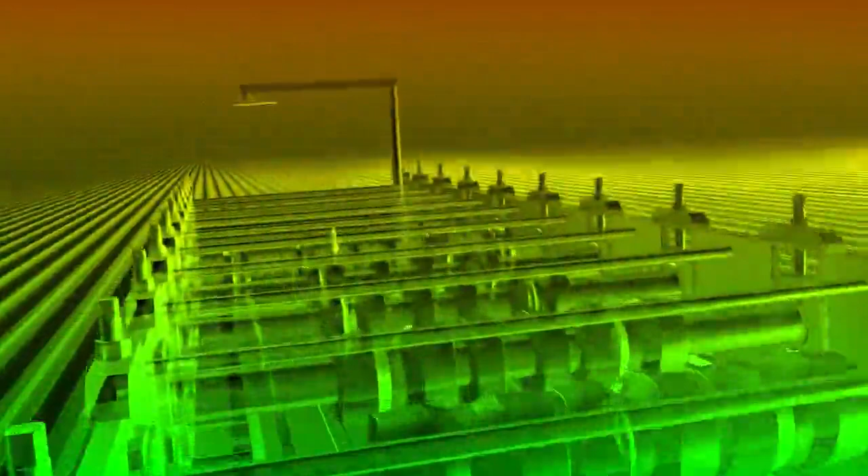The four things we're going to cover here: first, a basic introduction to roll forming, then the advantages and disadvantages of roll forming, a comparison between roll forming and brake forming, and then my favorite part, guidelines to consider when designing your parts with roll forming in mind.

And it all starts with an introduction to roll forming. At this point, I'm going to let Pat and Mike take it away.

Roll forming is a high-speed method of bending coiled metal, generally speaking, into a custom shape by passing the metal strip through a series of rollers. What's shown on the schematic is a basic line.

First off, we've got an uncoiler where the coil of material is fed out into the process. Typically there's a press we call a pre-punch press where we punch features into the part, whether they're holes, notches, tabs, or embossments. From there, the material is fed into an entry guide to give it a good, straight, square start into the rolls where forming takes place.

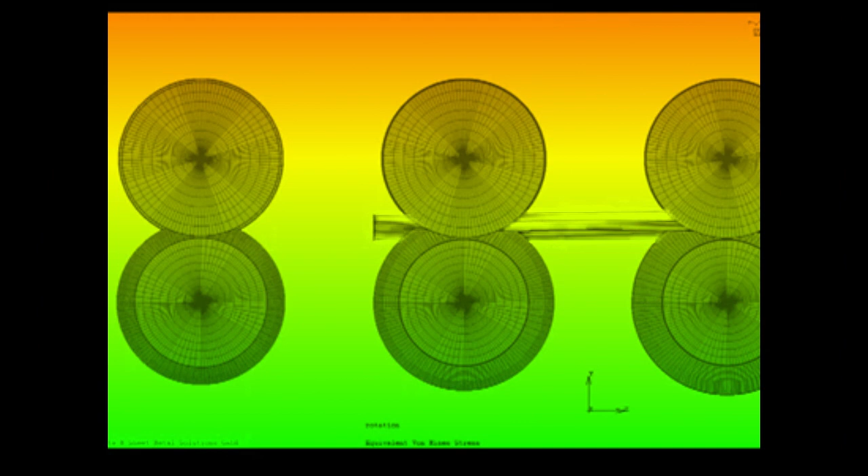Next in the line is the roll forming mill itself. We've drawn here schematically a mill with 16 passes, but honestly there's anything from only a couple of passes up to 30 or more in some roll forming machines. This is where the forming of the actual profile takes place in the mill.

Then at the exit end of the mill, there is a straightening device. Here's where we tweak the part a little bit. By this point it's at its finished and final shape, but there may be some adjustments needed to compensate for a slight twist, camber, or bow.

The next piece of equipment in a typical roll forming line is a cut-off press, where we cut the part to length. There could also be a post-punching press between the mill and the cut-off press, but in this case we didn't draw it that way. The part is cut to length and then put on a runoff table or runoff bar, where it's made ready to either be packed into shipping containers to go out to the customer, or put onto a cart and moved to another place in the facility for additional secondary operations.

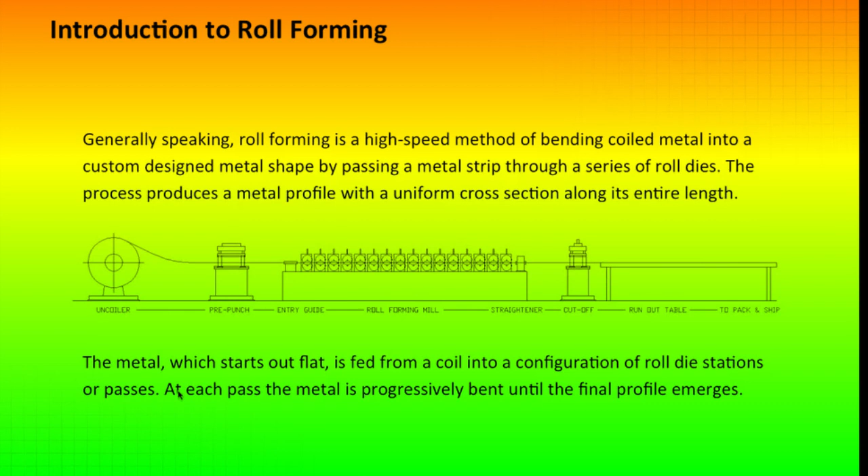All right, let's go on from here. Let's go to the next slide, Alan, which will show a set of roll tools, roller dies.

What you see here pictured is a model of a typical set of roll form tooling. You'll often hear roll formers speak of passes of tools, and that's how we refer to each set of top and bottom, or male and female, rolls. If you count them here in this model, there are actually 6 passes.

They're not shown in the mill, but they're shown as though set up in the mill. The light blue spindles indicate the machine shafts. At the top left, stock from the uncoiler would enter the mill as a flat strip, then progressively formed in each pass, going from pass 1 at the top left to pass 6 at the bottom right, where you'll see the final channel shape, in this case a simple U-channel, exiting the last pass of the mill.

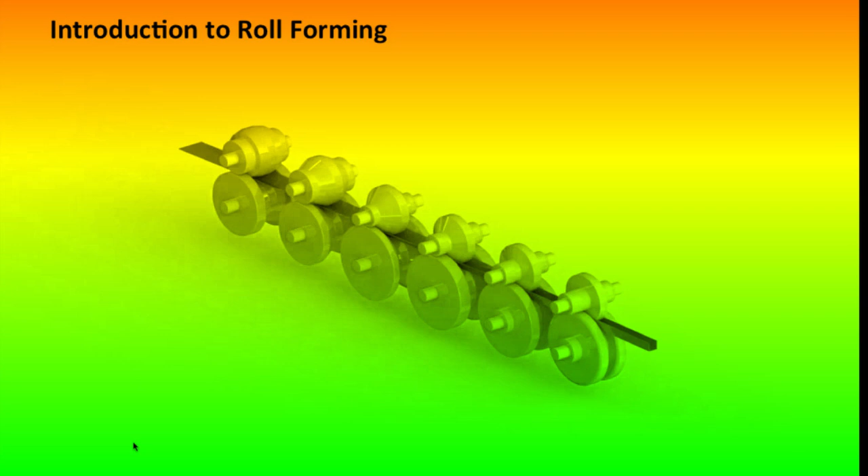Just a side note here, this is really just a representation of what you might expect to see. A light gauge U-channel or a light gauge part with short legs, very simple, might not even take 6 forming passes. On the other hand, you might require many more passes if the shape is complex or if it's a very deep channel. So keep in mind this is just representative of what roll tooling would look like set up in the mill.

What we want to do here is take a look at what would be representative of a single pass of roll form tooling. Let's focus on the section at the upper left where there's a green outline at the top of the rolls, T1, T2, T3, T4, representing the top roll or roll set. Then B1 through B4 in blue represents the bottom set of that pass. So what we're showing here is like an end view or cross-section view, something similar to what a tooling engineer would design for building these rolls, of course without dimensions.

You'll notice that the rolls are segmented or split, sometimes called slices. We have a couple of basic reasons for doing that. First, segmented rolls are much easier for manufacturing purposes. Rather than cutting the whole top or bottom out of a single billet of tool steel, we cut slices that are each closer to the finished size, so we waste less material. Being segmented also makes it easier for handling by operators. When they're going to put these in and out of a machine, the individual segments are lighter than if you had the whole top roll as a single piece, and the bottom too. The other reason we segment these is because it gives us a chance to use them as a universal channel set.

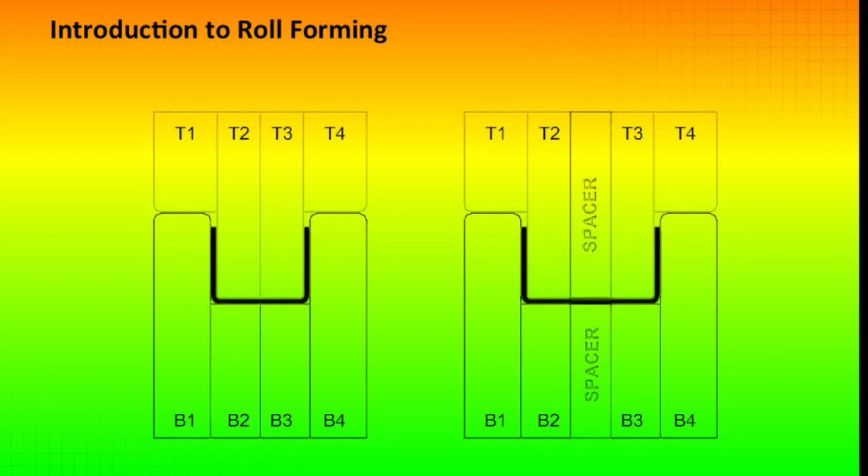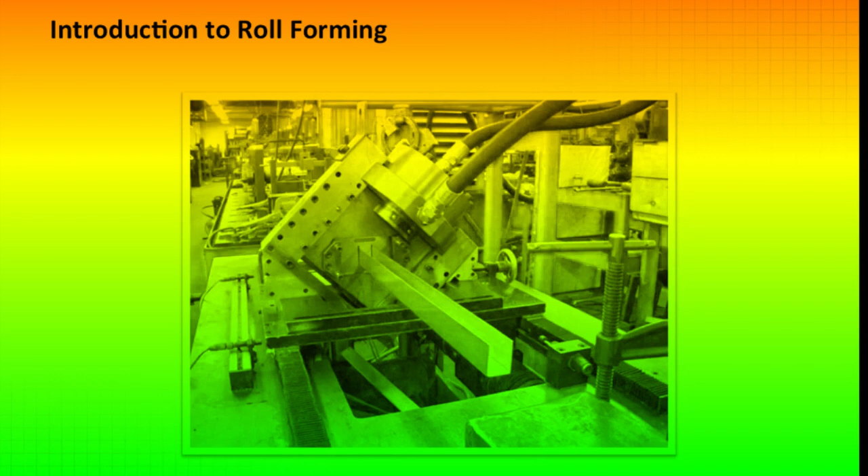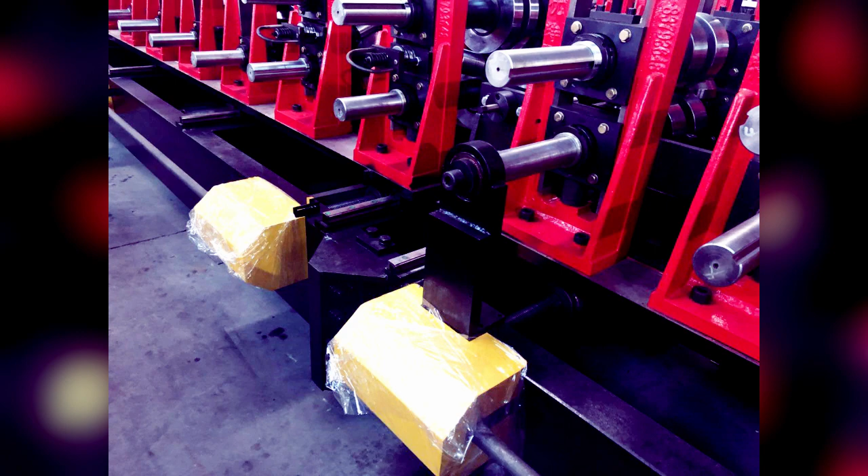The next slide shows the final operation in the line, the cutoff press. We're looking at the exit end of a hydraulic cutoff press that we use on a line very similar to what we've indicated here in this schematic. It's a proprietary design using a servo-driven, slugless cutoff.

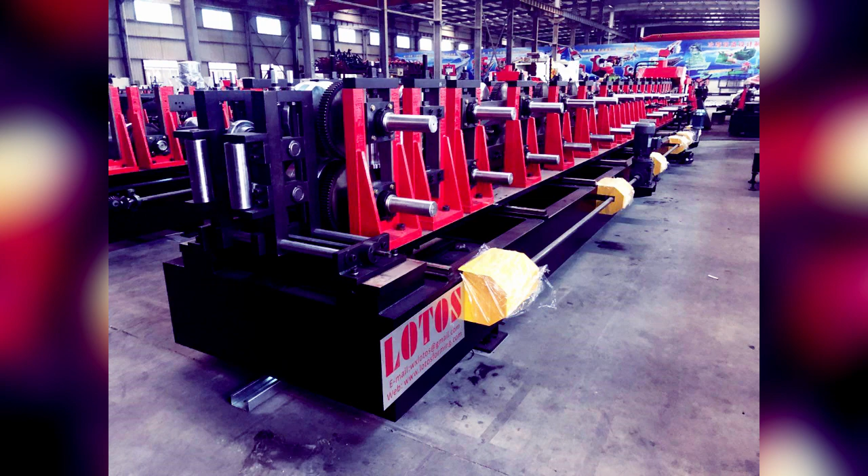For an open shape, we can use a couple of steel plates with a wire EDM profile cut through them that matches the profile with minimal clearance around it, so that when the die fires, a shearing action takes place that removes or cuts the finished piece to length from the roll form product, producing no slug, so there's no waste, and minimal burr, which is always a good thing. It's very intelligent, very efficient.

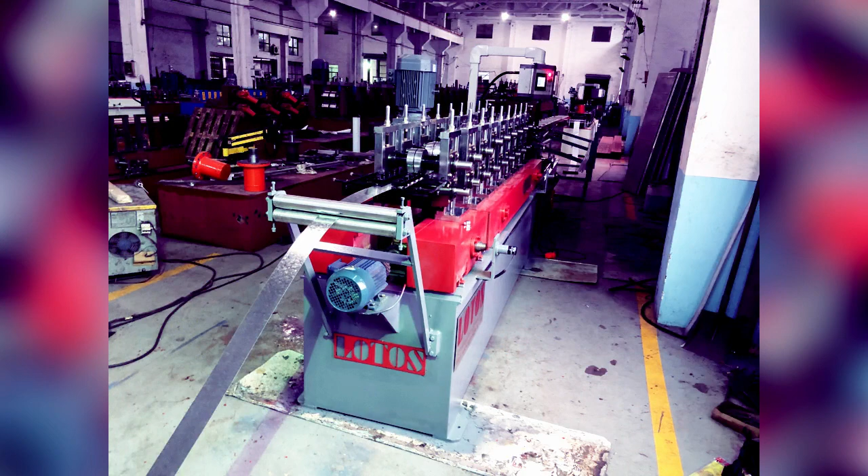The die sits at its home position until signaled by the controls to go out at line speed to the correct position, then very accurately cuts off the product to the correct length, and comes back to the home position ready for its next cut. Think about how efficient that really makes it. Other than having to load coils or move loads of finished product out of the way, the operator never has to shut the machine down. It's a continuous operation, a flying cutoff—parts go on, and production just continues.

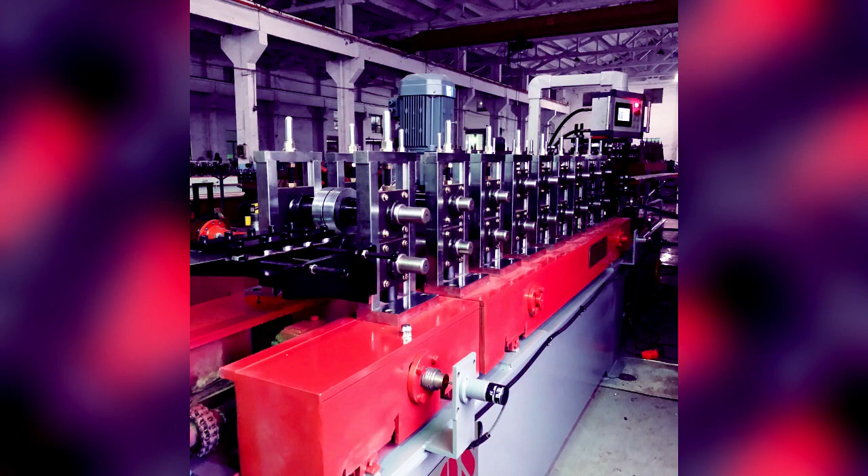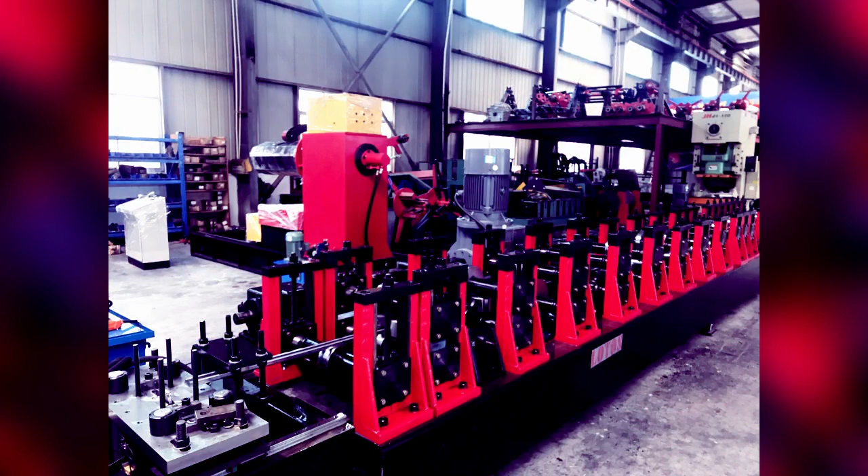So that was a basic description of the introduction to roll forming based around a very typical roll forming line. What we drew there in the schematic and the description we've given you certainly is not all-inclusive. Not every roll forming line looks like what we've demonstrated here, but this is typical. You could have more presses either before the roll former or after. Some people have presses in the middle of the roll former. So there's almost an endless amount of variation in how the line could be set up. But this gives you, I think, a good idea of how the process works.

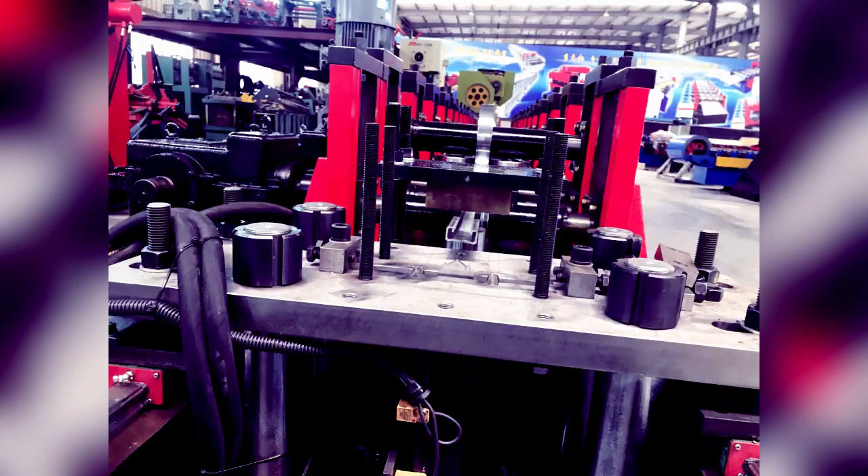So moving on here, our next subject we want to cover is the advantages of roll forming. If you turn over to the next slide there, Alan.

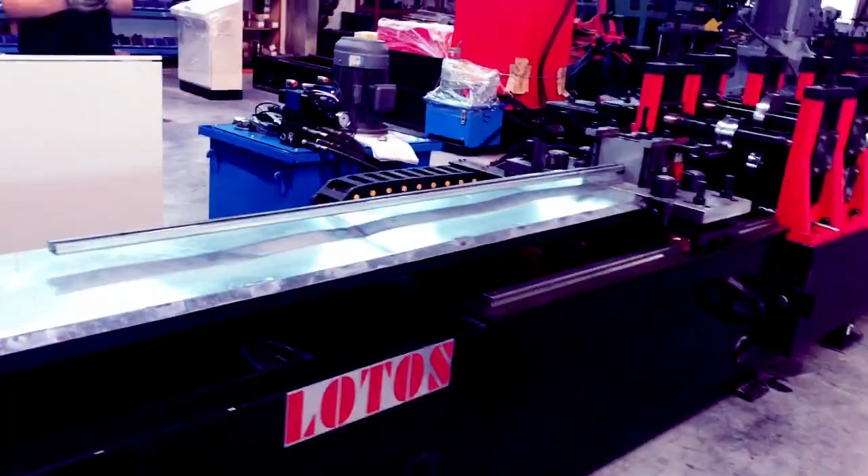So then down along the bullet points there, holding tighter tolerances. Typically, roll form product, because we have so many opportunities to control dimensions in the tool set, we can control dimensions, cross-sectional dimensions, much more closely than other metal forming processes, for instance, a brake.

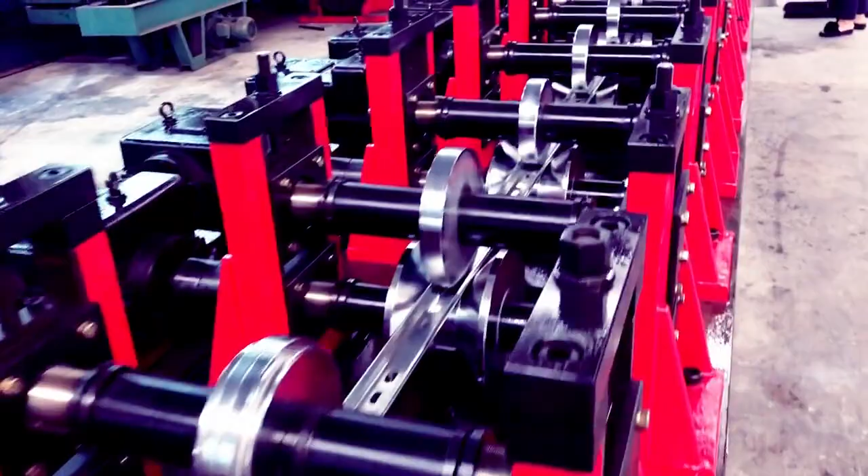When we're changing part lengths, it's really something that we can do on the fly. Quite often we can just put a new length into our controller for the line and go from 48-inch parts, let's say, to 60-inch length parts without moving a physical mechanical stop or anything like that. And because we're running a continuous production from coil and cutting it to length.

Material handling and saving on floor space, they both kind of go hand in hand. If you think about the line that we just described, a coil of steel goes on the entry end of the mill. Operations take place in the pre-punch, perhaps, forming through the mill, perhaps additional operations in a post-punch and or the cutoff. And out the end comes a part that is a net part, basically finished with all its features included, generally speaking.

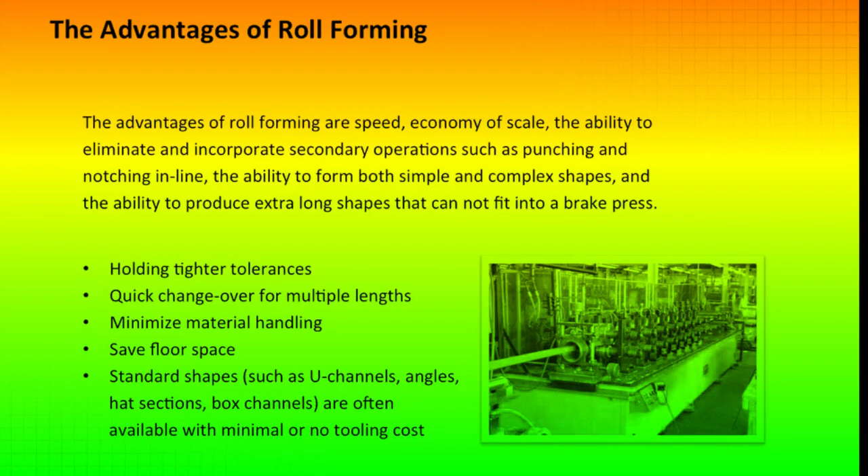The last point there, which we've touched on earlier, standard shapes such as U-channels, angles, hats, and box or C-channels are often available with minimal or no tooling cost. And that's for the reasons we already described. Many times there are standard or universal channel and angle sets that will fit the bill for what you're looking for. So in those cases, maybe just spacers, maybe just some cutoff tooling, certainly a lot less expensive from a tooling standpoint, than a brand new set of tools.

Then on our next page, certainly like any process, there are some disadvantages. And probably the single largest one with roll forming, it just doesn't lend itself very well to very small production quantities. When you think about what goes on here, at times for very simple shapes, we can set up a machine in a few short hours.

But more complex shapes, you may have a day or even 2 days at times into a setup. So if the production quantity is very small, all that setup time, along with any setup scrap that's generated to perfect the part during the setup, has to be amortized. All the cost that has to be amortized across a small production quantity, which can drive the per piece price up. The other thing that's a factor here is potentially higher tooling costs.

For a custom shape, that could mean an entirely new set of tools, which could be expensive. On the other hand, many times when more conventional forming and fabricating methods are used, there are multiple dies and multiple tools that have to be built, and each one in its own press and each one in its own operation. Where with roll forming, we can quite often incorporate a number of features in our pre-punch operations, either by gagging, actuating features in and out of the die as needed. In some cases, we have multiple stations in a single die that are individually activated by hydraulic cylinders. So higher tooling costs, not strictly true, but at times it is.

So that's one thing that would have to be taken into account.

You have a comment on that?

Yes, when you were talking about the quantity, Mike, as far as roll forming, I'd say rule of thumb is about a mile, or about 5,000 feet of product. If you have less than that, you probably should look at conventional shear, punch, and bend operations. When you start to exceed the 5,000 foot level, you should take a serious look at roll forming because it does become more economical.

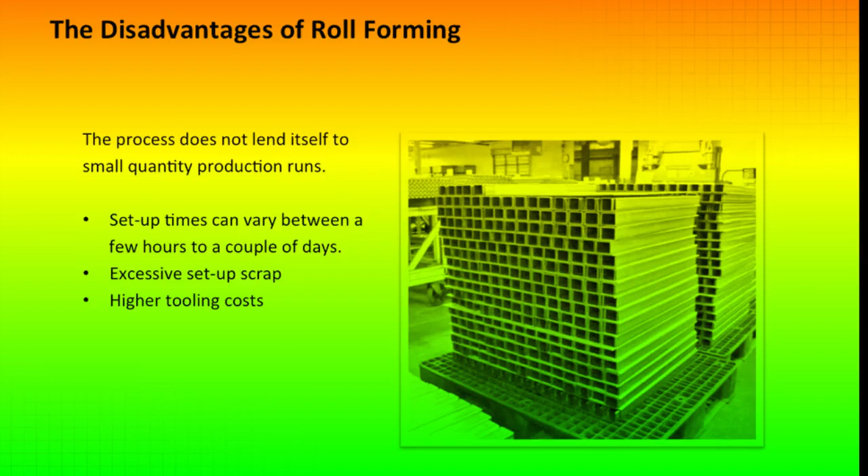And of course, there are times certain products just can't be produced economically other than by roll forming. So the good thing is, just let us take a look at it and see where we can help you with that. And we'll hold inventory when it makes sense.

All right, let's go on to our next page. We've kind of talked about many of these things, but here's a head-to-head, apples-to-apples summary of the pros and cons: roll forming versus conventional metal fabrication, which would include brake forming and shear punch, etc.

As we said, roll forming typically wins out when it comes to tolerances. We just seem to have more control over the product than brake forming does, generally speaking. In the roll forming process, we can include inline punching and notching, eliminating secondary operations that other fabrication methods would have to use as a separate operation. Roll forming can produce complex, even very complex, shapes, whereas more conventional forming is generally simpler shapes.

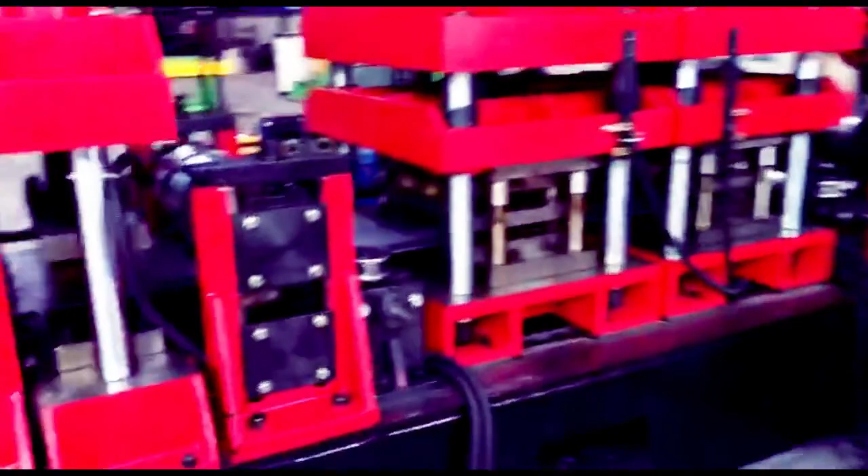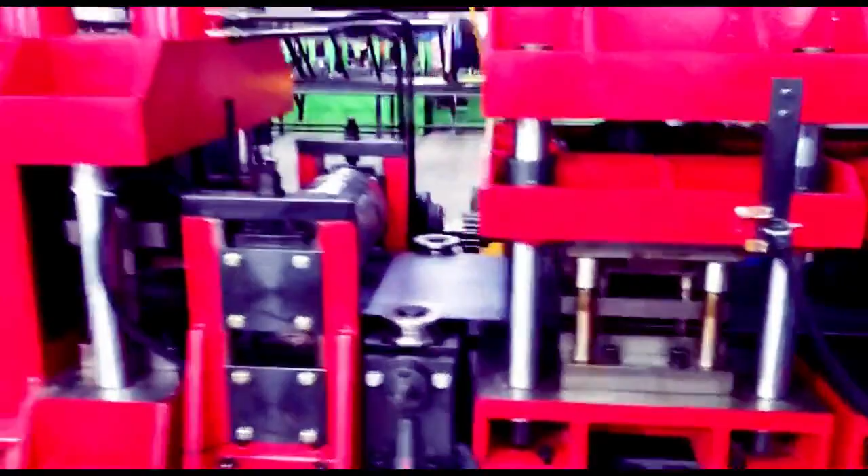Length of part itself, piece length: I've seen parts roll formed for rail cars in excess of 80 feet long. That's not typical, but it's possible. You're probably never going to see that on a brake, which is often limited to the size of the brake - 10 or 12-foot, perhaps a 20-footer at times. But roll forming, because it's a continuous process, we can cut it off to the length you require. The only factor that will impact that is material handling and trucking issues. But long parts are certainly an advantage of the roll forming process.

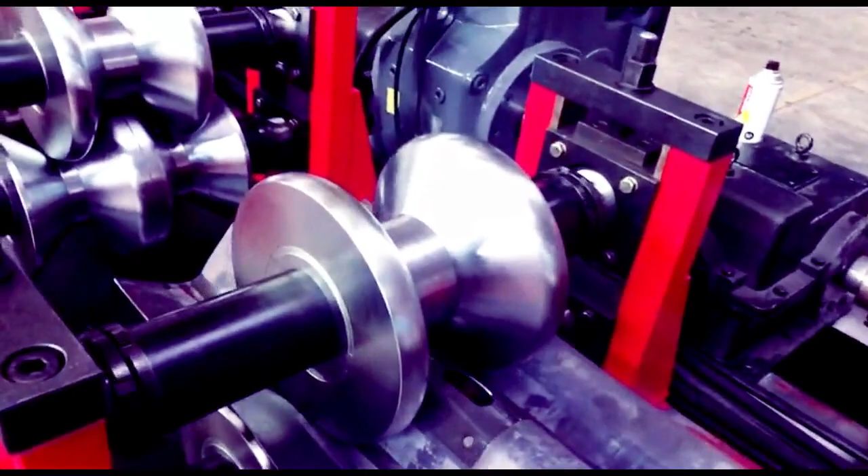High-speed production - once we turn the machine on, they run pretty fast, and you really gain some advantage there, especially versus the slower speed of a human being making each bend on a brake, along with all the other operations that go into that part. So what that does is result in lower labor costs per part for roll forming, which is an advantage.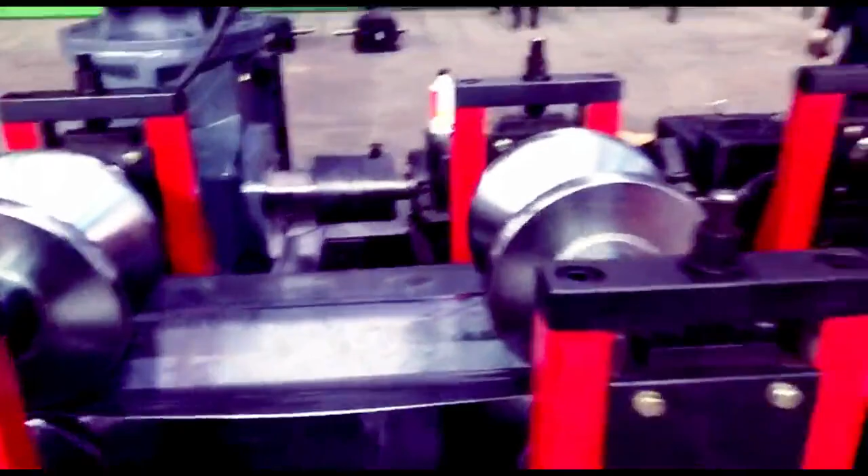One of the disadvantages we mentioned was potentially higher tooling costs for roll forming versus potentially lower costs for brakes and conventional forming methods. But there are, as we said, ways we can work with you on that - universal tooling, shared tooling, things like that that can help make it more of an even eye-to-eye kind of thing.

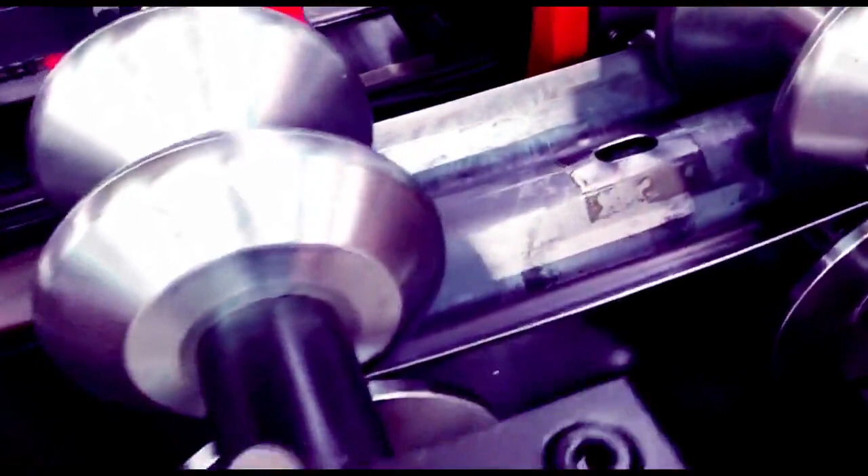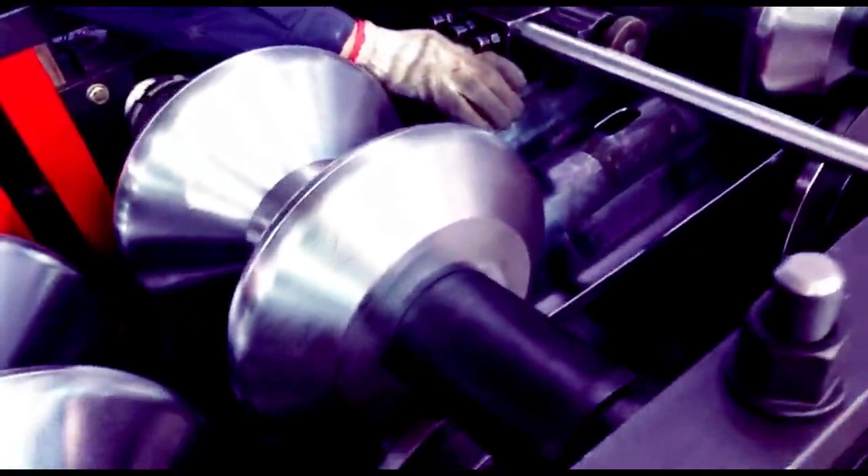Roll forming generally has a longer setup time. When you figure that the average roll form is 12 to 14 passes, you're going to have a fair amount of time setting it up and perfecting the setup before you're ready to turn on and make production. So in that case, typically conventional sheet metal fab might have a slightly better advantage there.

Potentially more scrap with roll forming versus brake forming, etc. Again, amortizing it over a large volume of product makes a difference there. So that's only a potential difference.

End flare, which is something we hadn't discussed up to this point, is pretty typical in roll form products. Basically, the end of the channel, the end of the product being roll formed, will flare out, especially at the tail end of the part, sometimes at both ends. You typically don't see that in a brake form product. Roll form, you almost always see that.

So at least on the surface, that appears to be an advantage to brake forming. However, there are cases where having some end flare in the roll form product is actually an advantage. We have some customers that use roll form products to stiffen vinyl, and having the end flare means when they put that stiffener inside it, it seats itself and stays in. It's not sliding in and out of the vinyl product. So they look at that as an advantage.

We have some other customers that can't tolerate end flare. We do what we can in the line to minimize it with some overbending, etc., special fixtures. And then we have some customers where it's like no end flare at all. In that case, there are ways to deal with it as a secondary offline operation. We can deal with it. It's the kind of thing we should talk about. If you have products that are sensitive to that, we need to know that up front. We'll certainly help you as much as we can to deal with end flare.

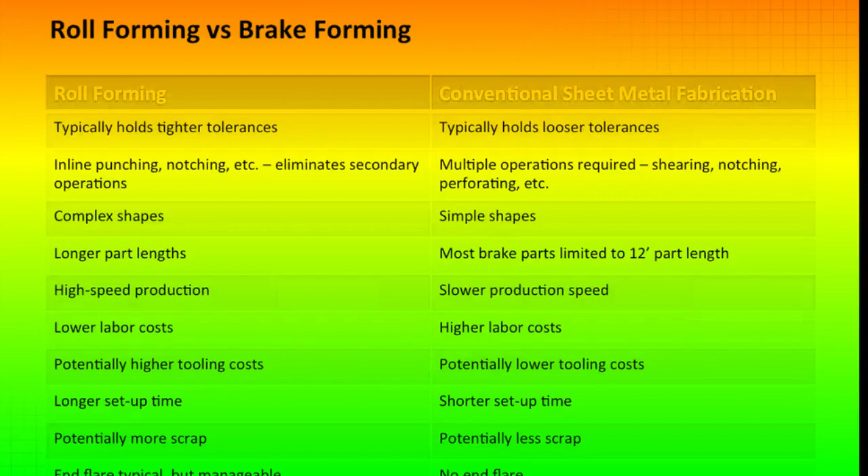That is a pretty good summary of what we've talked about so far, the pros and cons of the two processes, roll forming versus conventional metal fabrication.

We're going to go on now, Alan, to the next section here, guidelines to consider. These are some things that if you're designing a product and looking to have it roll formed, or perhaps you've got an existing product and you want to convert it to roll form to take advantage of the efficiencies of the process and reduce cost, these are some things you should take into account.

Now, they really are only rules of thumb. They're only guidelines, not hard, fast rules. Pretty much everything we're going to discuss over these next several pages has exceptions, and many exceptions. So all we're saying is take these things into account, and where you can design around these guidelines, you're going to benefit when it comes to roll forming your product.

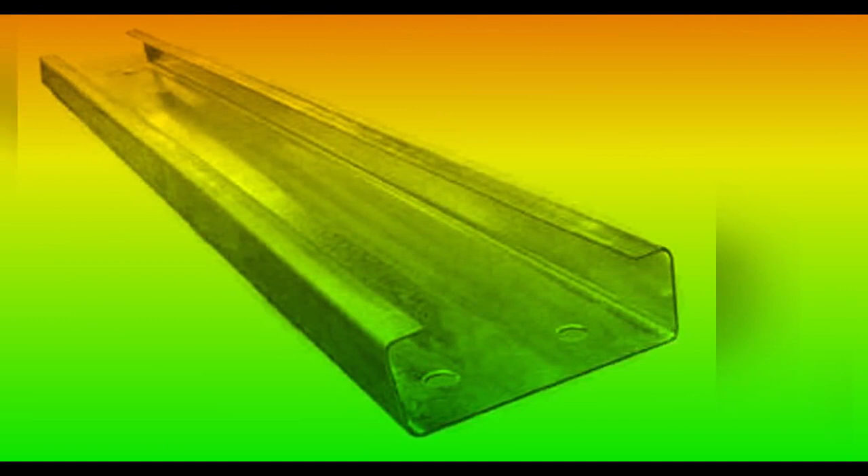So let's take a look at the first one. This is a wide panel, what you might think of as like a roofing panel, metal roofs. You see those quite frequently on residential and commercial buildings these days. I saw a metal roof on a building yesterday when I was out walking around the local community college, and what I saw when I looked at it was waviness, or oil canning as it's commonly called, up the center of each of those metal panels.

That's very common with wide panels. You get much over 5 or 6 inches, especially in the lighter gauge stuff, and the center is going to wave. So one suggestion here is to add these longitudinal ribs, which we've illustrated in this cross-section drawing. That can help to minimize, or at least disguise, some of the waviness that's in the center of the part.

Other products you might see that on, other than roofing panels, are building panels, door panels, garage door panels, that kind of thing—anything where you've got a wide web, light gauge especially, and you're doing forming only on the edges. So one way to compensate for that is with these longitudinal ribs, if that is an issue you're concerned about.

And again, as you get into the heavier materials, that will not be as visible. The lighter gauge materials, say 20, 22, 24, 26 gauge, you're more apt to see some of that oil canning versus the heavier, say 12 or 14 gauge.

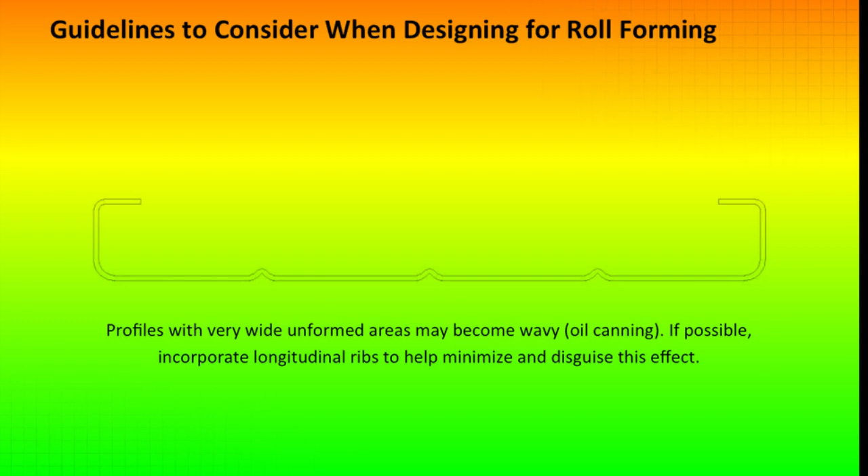Okay, that's right, Alan. Let's go over to our next page here.

What we're showing in this illustration is a J channel. It could be a cap for a molding or a panel. Quite often, all the forming on this type of product is done only on one edge of the stock, and the other side is left unformed. Depending on your use, you may see the unformed edge get some waviness or buckling to it.

If we can add a safety edge, a little hem, or even a slight bend to that, it tends to take care of that waviness along that edge. Now, depending on your usage, maybe it matters, maybe it doesn't. If that unformed edge is hidden in the final installation or assembly, then perhaps it's nothing to worry about.

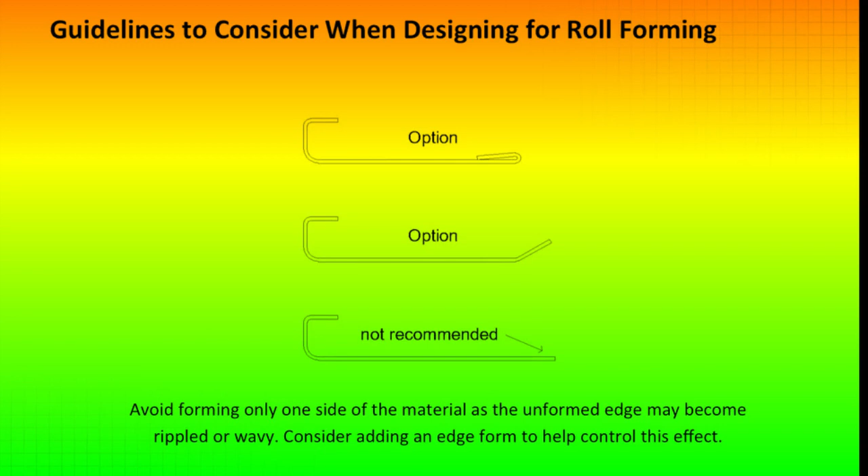J-channels are roll-formed all the time. However, if it shows, then perhaps consider putting a slight form on the edge, where in the bottom illustration we said not recommended. We'd like to see you try something similar to either of the options shown up above. Our next page.

There are ways to work around this. If we know that the bottom bends are critical and need to be very crisp or square, there are things we can do in the tooling to make that happen. On the other hand, if it's not important to you—say this is just a stiffening product and it's hidden from view—maybe those larger radii don't matter in your particular use.

If they do matter, though, be sure to call that out so we can make some provision for that. All that happens is at the point where the top bends cover the bottom bends, you no longer have access with the male tool directly to the inside of the bends, so they tend to round off and get soft. Again, it depends on your application whether this is a big deal or not. The main thing is to let the roll former know whether that's something you care about or something that doesn't affect the final use of your product. It's a good discussion to have.

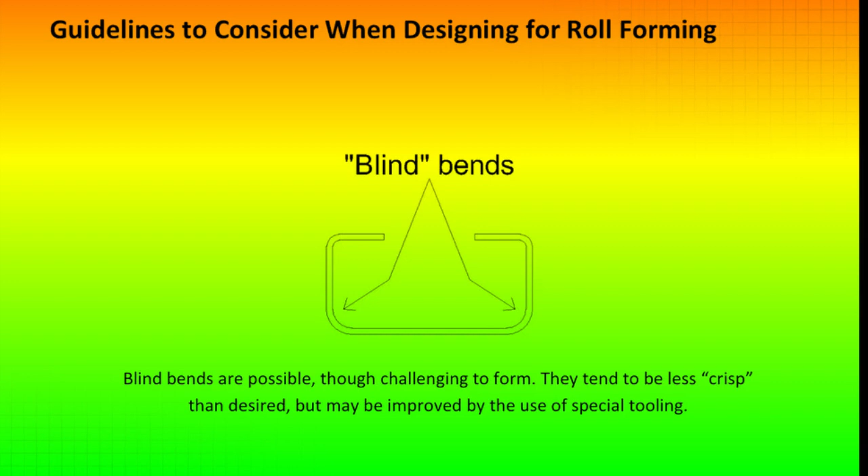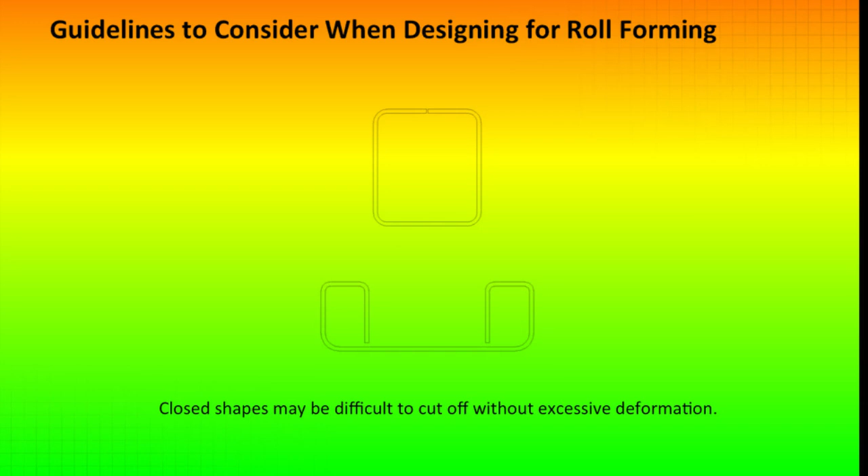We just, you know, each product has to be addressed individually as to the cutoff method being used. Just keep that in mind, and we'll certainly work with you on any designs you have where you think that maybe you can get away with it, maybe you can't. We'll be happy to give you some guidance. Cutoff is a big issue when it comes to roll forming, so we'd like to get in early and help you work through those issues in the design stage if at all possible.

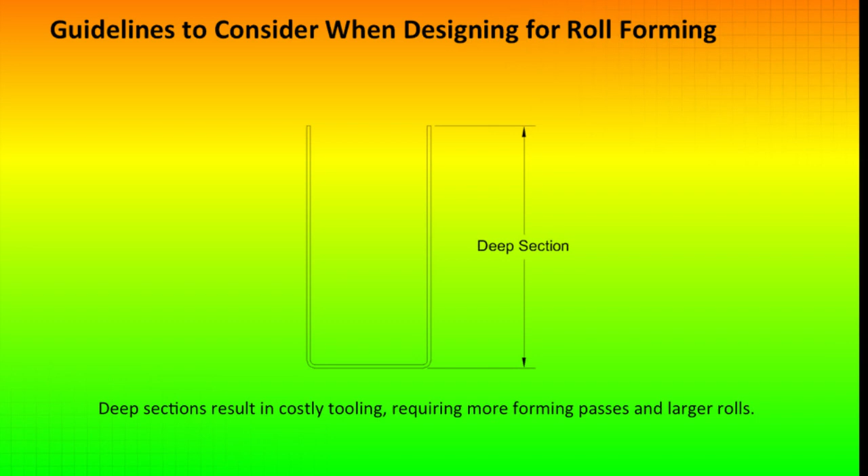Now, all that said, can this be roll formed? Yes, and it is every day. Just deeper means more expensive from a tooling standpoint.

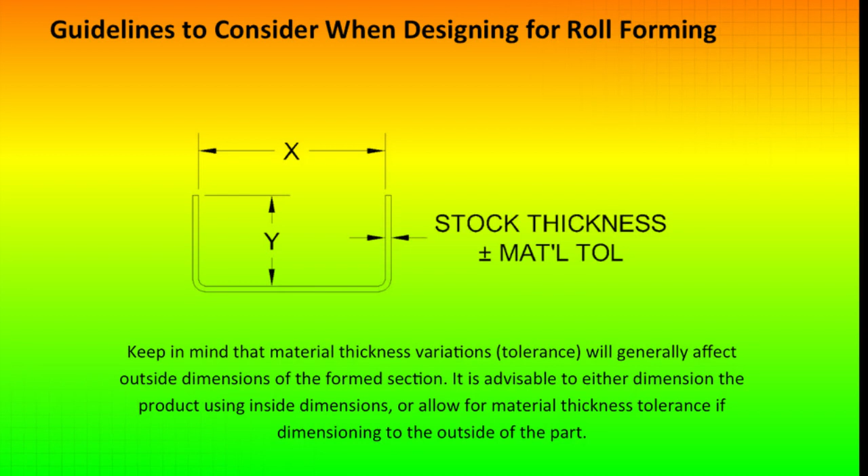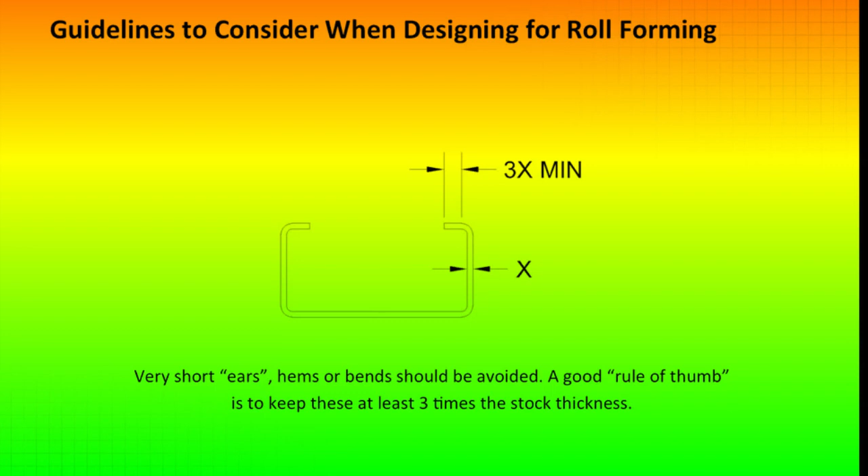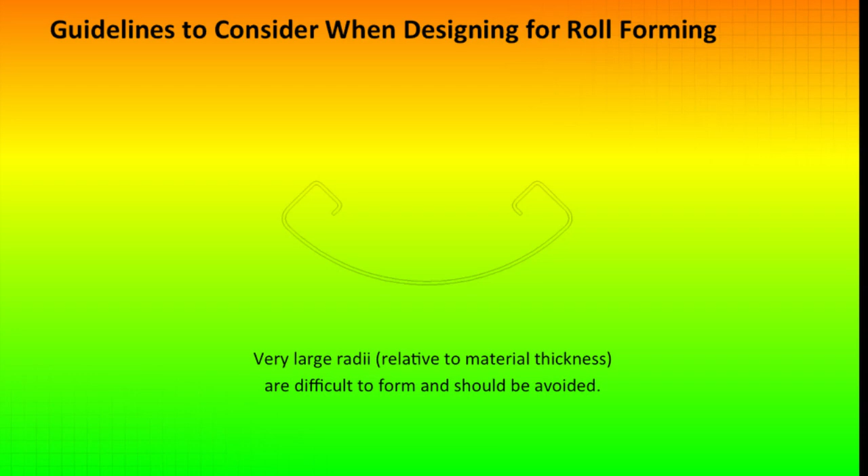As opposed to being a true radius or true arc, it's generally a series of shorter straight bends that will simulate an arc. So if it's high strength material, something with a lot of spring to it, stainless, it's pretty tough to do. There's just so much overforming required that it's very difficult to make unless it ends up being faceted.

Let's go on to our next page.

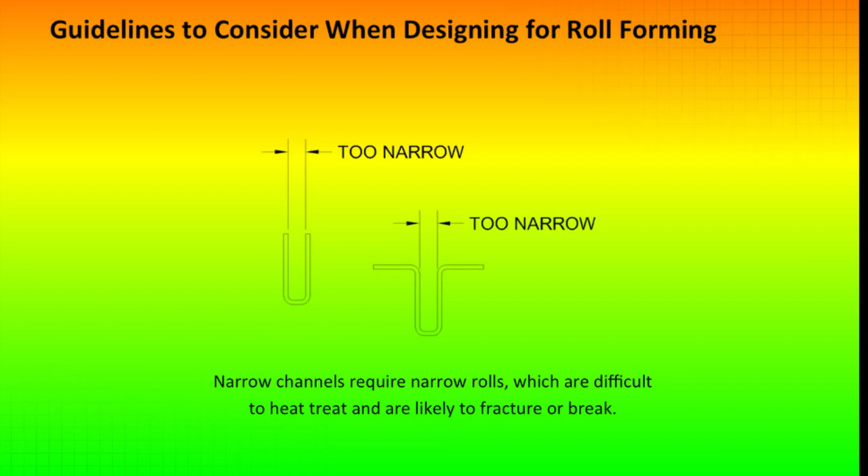So very narrow channels—yes, it can be done. Just be aware that there are some tooling issues involved. We'll certainly work with you to work through whether the material gauge, the material properties, and the channel width are appropriate, if they all fit together.